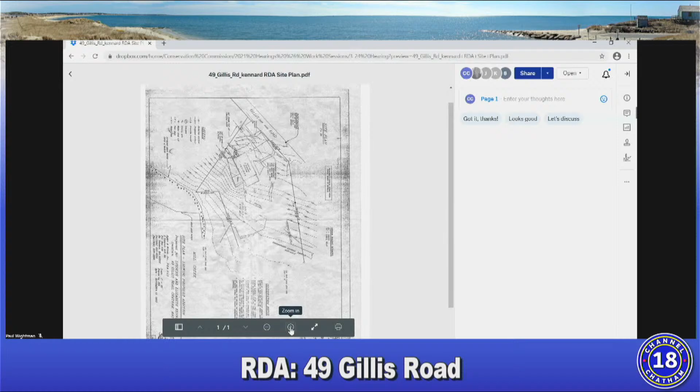And just the sonotubes would be installed, that would affect the coastal bank, nothing else? That's correct. And then you have a set of stairs coming around the other end, for the deck itself? There'll be stairs on the patio side that's already existing, and then there will also be stairs pretty much where there are on the front of the house on the porch. There are stairs coming in there, so we will be keeping those stairs. Okay, so the additional stairs would just be off the back towards the patio? Towards the patio, correct.

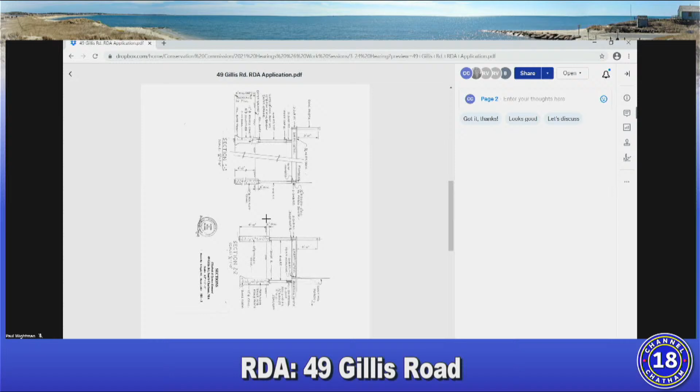As long as it's within that same footprint of the existing wall, inside of that wall, I would approve it. I do have some concern about the vegetable garden on the coastal bank itself, further down. But for this project alone, I would be okay with just those sonotubes. And that's all I have to say, Bob. Thank you. Okay.

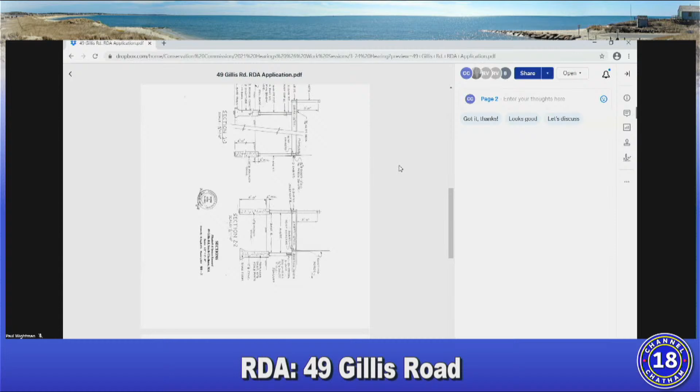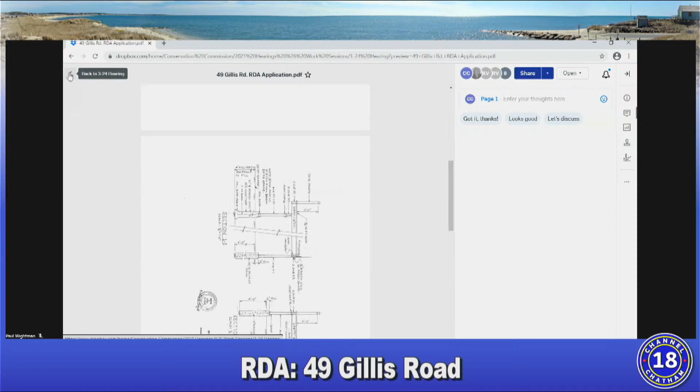Tom Clark, do you have any questions? Yeah, my question, unfortunately, is that the site plan, and now it sounds like it was an old one that was put up, given Bob's other comments, but the site plan that I was given had a big smear across the middle, which made it very difficult to evaluate the project. I'm glad that Bob mentioned the coastal bank, because that's almost completely missing from the plan I was given, and there wasn't one in the Dropbox.

So this is procedural. I had requested a replacement plan, but it never happened, so I assume, given all the goings on, that was overlooked. But my concern is the fact that we're building a deck on a coastal bank. That really troubles me in terms of stability and other factors that unfortunately I couldn't really evaluate because of the inadequacy of the materials provided, which I'm not saying are the fault of the applicant. That may have been something that happened in-house. I don't know. But that troubles me, having a deck on a coastal bank, and even with the sonotubes, which I recognize our informal regulations recognize as mitigation.

Mr. Chairman, can I just, it's Paul. The cost of doing a new plan would be really substantial for what is really an alteration for just a few sonotubes. That's the alteration, really.

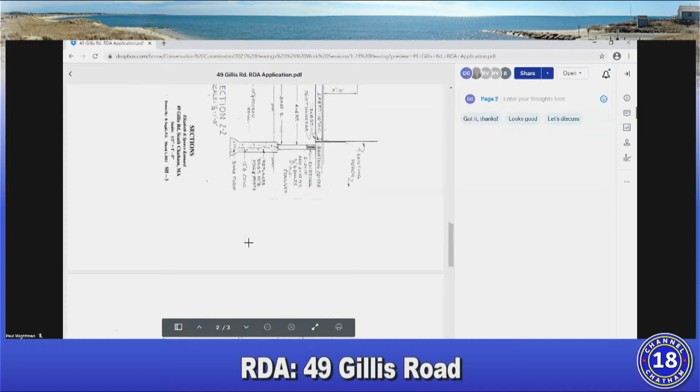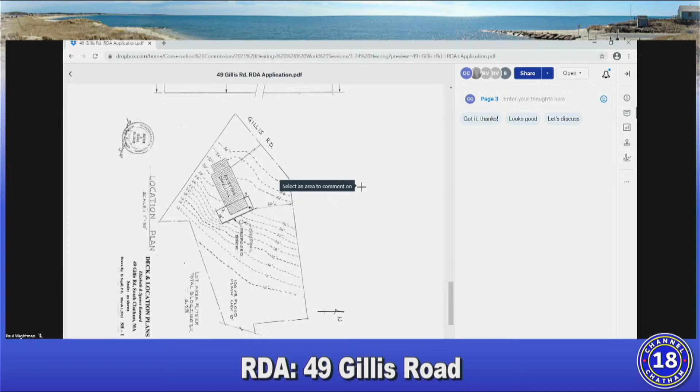And then there's another one that Mr. Kennard showed me when I was at the site, because of a couple of questions I asked. What he had is, correct me Mr. Kennard, an old site map from a previous edition, circa 2004 or something like that. Correct. Right. And that site map showed at the time what the resource boundaries are, whereas the current one, the new one, didn't show that, at least in the digital copy that I have.

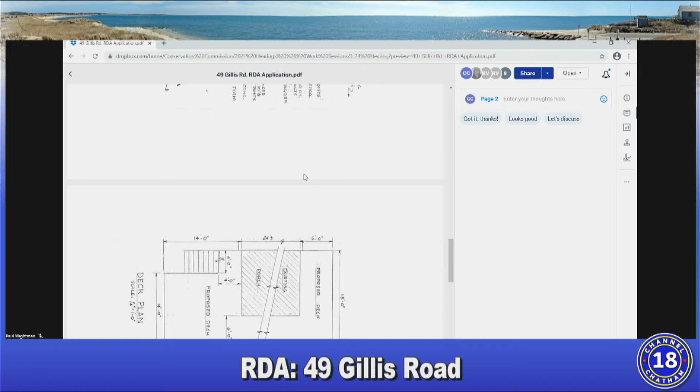So which one, Tom, are you saying is smeared? It's labeled site plan, and it looks like it's a copy of a blueprint, given its fuzzy nature.

And it's stamped March 9th, 2021. That is the current stamp. There's also a stamp from way back when that looks like, wow, I can't even tell what it looks like. 11/16/63 or 93, I can't really make that out because that's not very clear. It didn't reproduce well. The site plan is November 13, 2003. It was prepared by Ryder Wilcox.

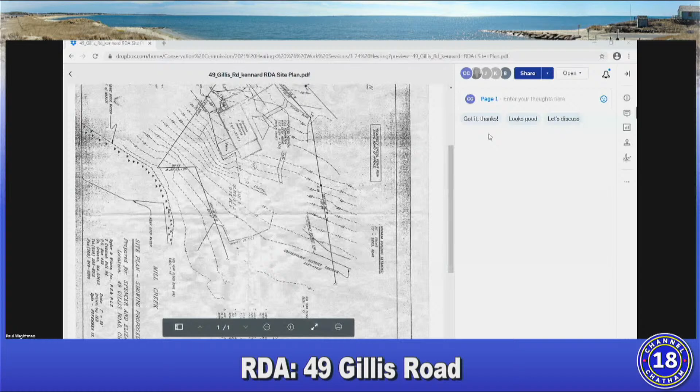Right, the one that you're looking at, the one that's on the screen right now, it's the site plan from 2003. Okay, all right. That's very helpful, thank you.

So, any more comments or questions, Tom? No, I'm just concerned about building a deck on the top of a coastal bank. Okay.

Commissioner Latin, do you have anything that you would like to hear? Well, the only thing that I would like to say is that I am concerned about the ground under where the deck will be and how that will be taken care of so that it doesn't erode, because it does go down the hill. I just want to make sure something's done to make sure that erosion does not happen.

All right, okay, anything else? Is that it? That's it. Okay, so I have a similar concern. I think when I was there, there was no plan to alter the ground beneath the deck, so it would basically be after the deck is in as it is now. So you can make the argument that if it's not eroding now, it wouldn't erode then. I don't know.

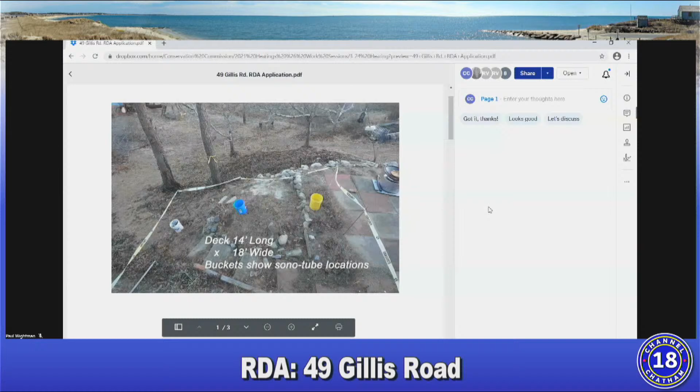So I think in general I would be willing to support it. I would be interested in having measures put in place to be sure that there is no erosion from the deck, no altered pattern of runoff from the deck after it's in, and so forth. I'd be interested in seeing something like that.

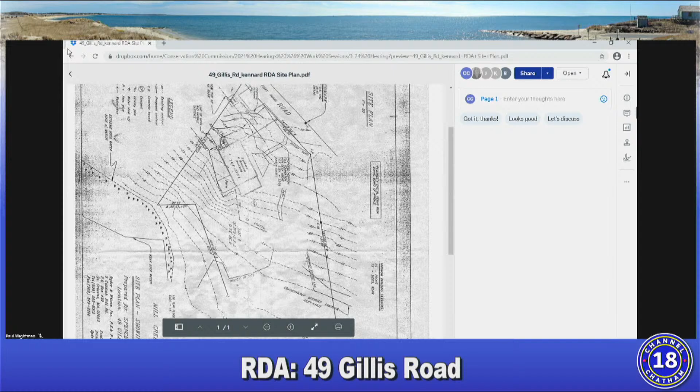Paul also mentioned, no, it was Bob who mentioned the vegetable garden. I saw it as well. Let me ask you a question, Mr. Kennard. The 2003 addition, did that have a mitigation area associated with it? It did not. It was on the left side of the house, out of the resource area. Correct, yeah, out of the resource area. Okay, just out of. Yeah, mitigation was not called for. No, it wasn't. Okay.

So the vegetable garden is on the coastal bank, and we actually have a lot of applications these days for vegetable gardens in resource areas, a number of which we have turned down. So what I would suggest, when we go to look at applications, we will sometimes notice other things, and that is what happened here. A number of us noticed the garden, and we can't just pretend like we didn't see it. So what I would suggest, and I talked with Paul a little bit about this, is for you to submit an administrative review for the garden so that we can get it recognized, get it on the books, and deal with it in an above-board way, if you would be amenable to that.

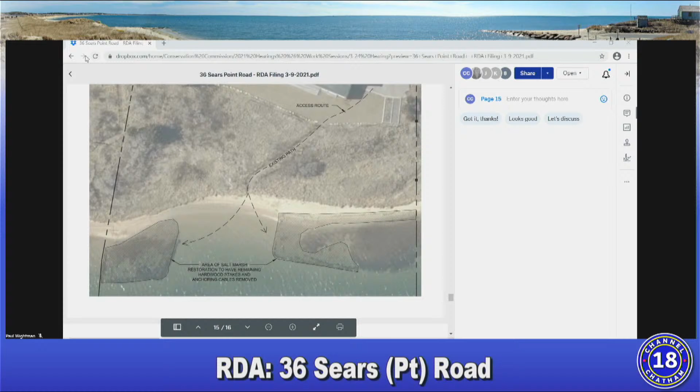So without any further questions, does anybody have a motion on this? I'd like to make a motion that we vote on this RDA. So the motion, I guess, would be a negative determination. Yes. All right, okay, Clark, second. All right, so Commissioner Clark, how do you vote?

Oh God, here we go again. If you're in favor of it, it would be a negative. If you're not in favor, it would be a positive. Negative, then. Okay, Commissioner Latin.

I have to remember we're standing on our heads with this one. Exactly, negative as well. Commissioner DeVecchio, negative. And negative for me as well. So that's a unanimous negative determination.

Just a point of order, Bob. Can I make an observation? Sure.

I've been on the commission for a little over a year, and it's only been very recently that we've started seeing a lot of RDAs. I think some people are getting happy feet about using RDAs as some kind of shortcut. And I think what we see with these two applications is that it's not a simple tool. Matter of fact, it can be very complicated and has its own shortcomings. So I don't know how we make it known, but the sudden obsession with using RDAs I think is poorly considered because of its shortcomings as a legal vehicle. So I just want to mention that so people know this is not a simple solution to a complex problem.

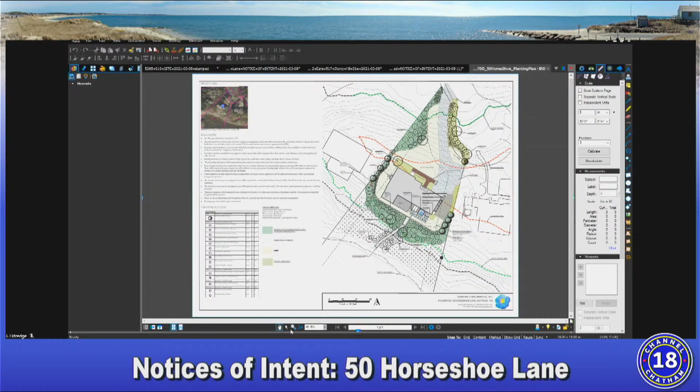On the south side of the house, the property owners, the Palmertons, are new property owners. They're proposing to install a hot tub, shift the existing rinse station to the east, and provide a bluestone stepping walkway to allow them to get from the outdoor shower to the spa and up onto the deck and then down into the bulkhead.

This area is currently almost entirely filled with gravel, so it's really just transferring and allowing for ease of access and circulation, and then removing the gravel and planting a fescue lawn in the areas that are currently gravel right around the south side of the house running from east to west.

There is an existing timber wall to the west of the staircase that is in poor condition. It's rotting and degraded, and we are proposing to repair and replace that timber wall, as well as extend it to the east to allow for easier access and circulation.

On the east side of the dwelling, we've got a gravel area and invasive English ivy at the top of the slopes, exactly in that area that Paul's pointing out. So we would be removing that English ivy, doing some minor regrading, and then extending that wall and planting that area with a fescue lawn.

On the area just to the east of the dwelling, there's an existing gravel parking area. We're proposing to remove that gravel and put in supported grass, a grass pave in that area - turf lawn on a plastic grid, that would be a fescue lawn. And that's just for occasional parking where the family will be storing a small boat in the off season.

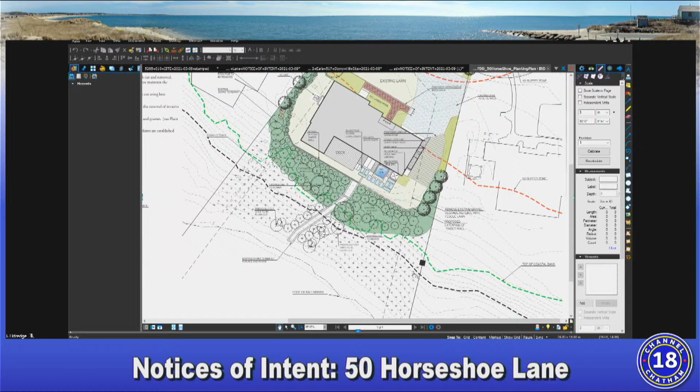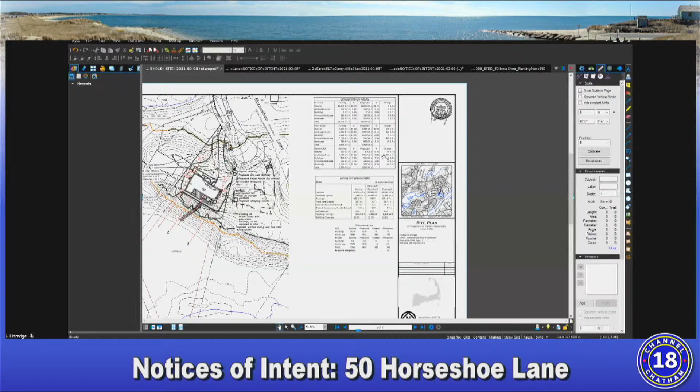I guess it's my turn to start. I had a little trouble following your coverage tables, but essentially it looks to me like you're increasing the amount of coverage by a small amount. You're taking out a lot of what I think is pervious hardscape and replacing it with more pervious hardscape. Is that a fair statement?

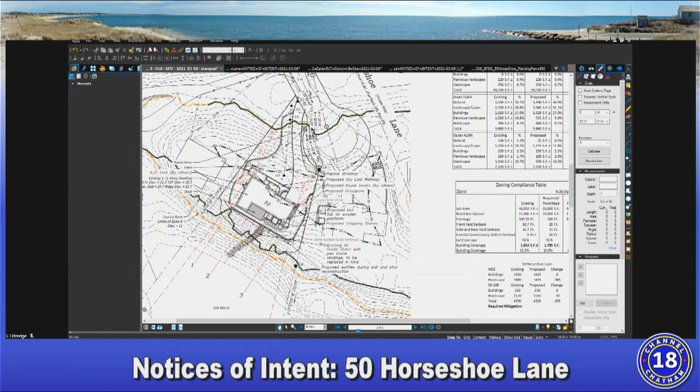Yes, so we currently have a stone driveway to the side that's being replaced with Grasspave, which decreases our pervious hardscape, even though it's still a used area. In the back, there's more lawn going in where there's currently pea stone, and it's hopefully an upgrade with everything.

So the net increase in impervious coverage is what, if any? 40 square feet of impervious. Okay, that is total within the 0 to 100. Correct. Within the inner area, it would be an increase of 80, and within the outer, it's a decrease of 40. And so we have as mitigation more than adequate amount for that increase in coverage.

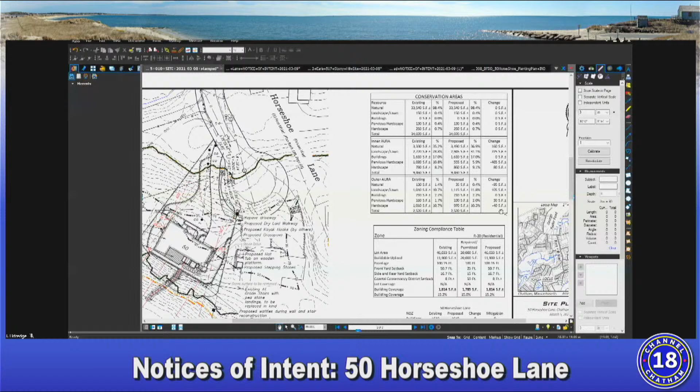Okay, fine, I just want to be sure I understood it. So I do have a question about the area on the driveway side of the house where in the landscape plan, Teresa, you have it color coded. You have two shades of green - the invasive species is a dark green, and on the other side of the driveway is a different shade of green.

Typical landscape, right, exactly. So what's existing there is a mix of non-invasive but exotic plants. This is right bordering the edge of the circle at the end of this road. The property owners would like to maintain more of a landscape here. So where all other restored areas are allowed to naturalize in perpetuity, this area would be proposed to be maintained because it's along the edge of the road.

Will need continued maintenance - there'll always be disturbance from plowing and other activities in the roadway. So they would just like to be able to maintain this regularly. We're calling it a typical landscaped area versus an area that's going to be restored and allowed to naturalize in perpetuity. Okay, so that's outside the scope of mitigation. Exactly, that's outside the scope of mitigation. We're not calling that mitigation. We're basically just looking at removing the invasive vegetation and restoring that to a landscaped, manageable area so the property owners between the driveway and the roadway can maintain that portion regularly, just to keep it invasive-free and clean.

Okay, and the other thing was the new lawn, the lawn itself in the 0 to 50. That's not going to be irrigated, is it? Only to get it established. So we're going to do the fescue lawn mix and it would be irrigated just to get it established, and then it will be on its own after that. Okay, and that's behind the house. It is, it's basically replacing pea stone. Yes. And is that the existing lawn in the 0 to 50, in the back of the house and the side of the house there, is that irrigated now, or is it not?

I am not sure, you mean on the street side of the house? No, I mean on the south side of the house and on the west side of the house. Don't believe there's any irrigation at all on the south side of the house, but I'm not sure on the north side if that lawn is irrigated. I will have to check with the property owners on that. Yeah, okay. So we wouldn't want any permanent irrigation on the south side anyway, or the west side. Thinking maybe if they want to continue it on the front of the house on the north side, that would be okay in my eye. Okay.

Other than that, there's some English ivy on the south side of the bank, the back of the house. So that's going to be all removed and replanted? Correct, where the new wall is going in. Yes, that's correct, all that English ivy will be removed. Okay, good, that's a good thing.

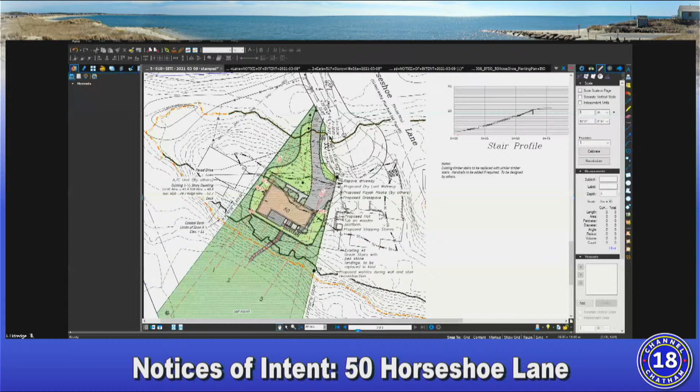All right, if I got everybody, I did have one follow-up question, more of a general request on landscaping plans. Very often, Teresa, not just yours but others as well, lawns are identified or labeled in a way where it's difficult to figure out whether there is non-native lawn or fescue/native lawn. Would it be possible, as a future request, to label native lawn versus non-native lawn more clearly? We have a call-out box, but maybe a different shade, texture, or hatch pattern.

Something would make it really clear, because very often I and others have questions about what is the nature of that lawn there. It would just make it easier for everybody.

Sure, absolutely. And quite honestly, I'm beginning to think that the term 'typical landscape' - we need to flip the paradigm on that. The typical landscape is code for non-native. It would be delightful if we could just start saying landscape, and anything that's not landscape is non-native. But anyway, that's just sort of an aside.

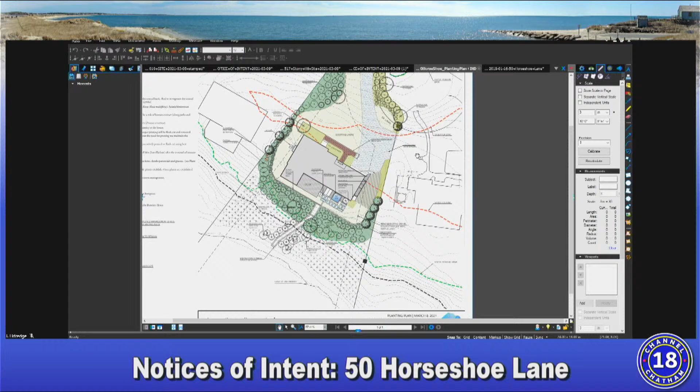Commissioner DeVecchio, aye. Commissioner Clark, aye. Commissioner Latin, aye. And I vote aye, so that's unanimous to continue to the April 7th work session. Thank you.

You're welcome. So moving on, Paul.

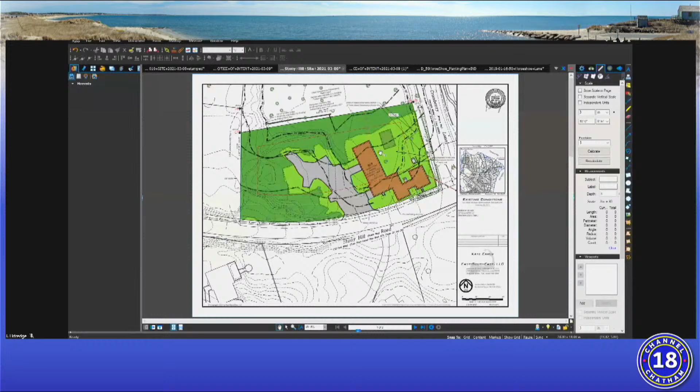Thank you, Mr. Chairman. Next on the agenda is notice of intent, 517 Stony Hill Road, Catherine Gledhill Earls and Michael Earls, no SE number yet. Proposed razing of an existing house, construction of a new dwelling, pool house, construction of a new septic system, implementation of a land management plan at the same address, assessors map 15-1, parcel 21.

Good morning, Mr. Chair. Bill Riley on behalf of Kate and Michael Earls. The team is Thad Eldridge, Jen Crawford, and Susan Sangiolo, our landscape architect.

It's pretty straightforward. If you've been to the property, the structure that's there hasn't been used in any significant way for many years, is deteriorating, and certainly is not appropriate for the neighborhood or usable by a family. So the Earls want to remove that building and construct a new home with a pool and a pool house.

What I'd like is to have Thad run through things, and then we have Jen Crawford for the land management plan, and Susan Sangiolo is available for questions on landscape architecture.

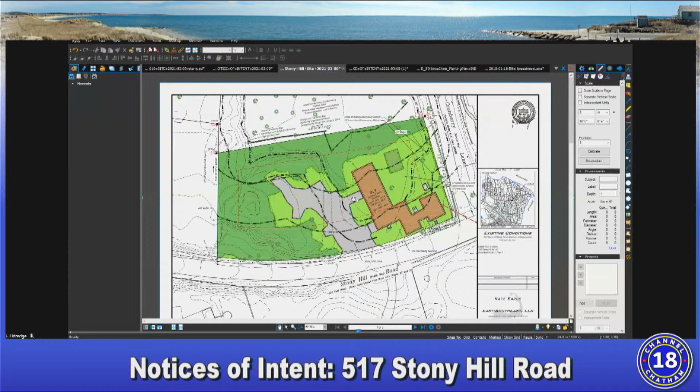The site itself is overwhelmed with Japanese knotweed and a few other invasives, but the knotweed is pretty substantial here. As Bill mentioned, we have an existing dwelling located less than 50 feet from the BVW. The proposal is to take down that dwelling and reconstruct the site, keeping as much out of the 50-foot buffer as possible. All the structures are being proposed outside of the 50-foot. There's a little bit of lawn that will remain within the 50.

And as Bill mentioned, we have a proposed driveway, house, and septic system located outside the 100-foot, leading over to a proposed pool with a pool house. And for mitigation, we have Jen Crawford.

Good morning, can everybody hear me okay? Excellent. So for the record, Jen Crawford representing the applicant. As Thad said, basically the portion of the property that is naturalized is inundated with various species of invasives, in nature, so to speak.

There are some native trees that are present - a couple of pitch pine, a couple of eastern red cedar, a few oak off to the east side. But the majority of the trees that you see on the property are actually off the property line. The land management plan that I submitted shows where those are and shows that they're just off property.

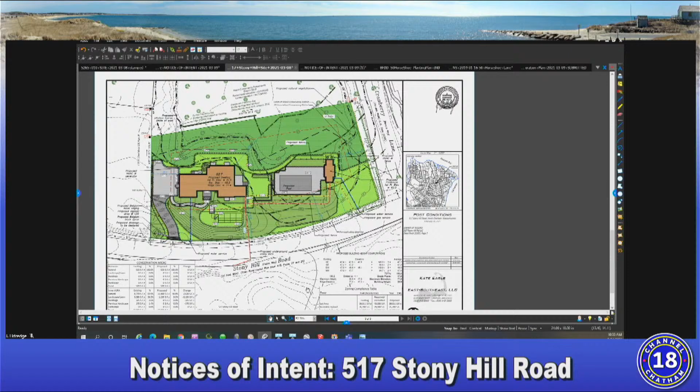Okay, Commissioner Clark. I didn't have any questions, but I did have one observation, and I've mentioned this several times to Tad, and I'm going to mention it one more time. I noticed on the table where you do your calculations of mitigation and so on, that you've gotten in the habit in the last couple of months of giving yourself double credit when you move out of the NDZ or out of the ORA. There's nothing in the regulations that permits you to do that.

I think as a policy matter, it's a good idea, although I'm not sure I would double it. But I think anytime you take improvements out of the NDZ, and even out of the outer ORA, that definitely is something that should be credited. But there's a doubling of credit when I don't think there's anything in the regs that supports it. It shouldn't be done. And now you can tell me why I'm wrong.

Well, I can say that it's not been a couple of months that I've been doing this. It's been for 16 years since the bylaw and the regulations were adopted, and that's carried on with the different mitigation guidelines that have been adopted by the commission. The last, I think, was revised in 2009, where we gained the 2-to-1 and 1-to-1. I've reviewed other filings and everybody does the same. And if you want to encourage people to get out, you should encourage it. Not giving credit where credit is due only encourages people to maintain within the no-disturb zone where they can.

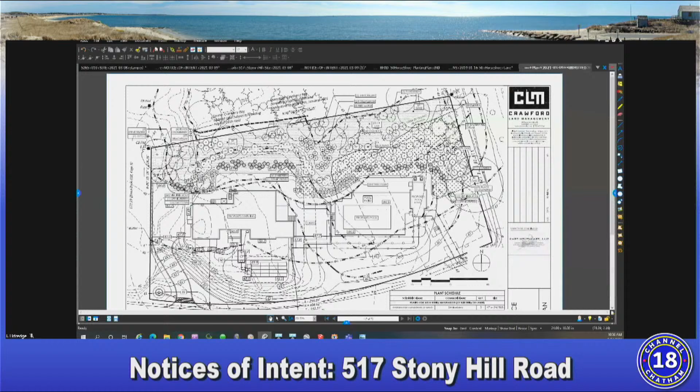First of all, I want to make sure that I understood the landscape plan showing that. Is my understanding correct on that? Bob, I think it's important that the homeowners are able to traverse all the way around the property, and that area is very narrow, only a few feet wide. But I think for maintenance purposes, it's important that they be able to access all those areas without having to go through naturalized areas. And on top of that, I think the ability of the project to provide basically an almost entirely vegetated no-disturb zone, as well as additional restoration for the invasives along the BVW, means no matter what, this project is a net benefit.

Bob, this is Bill Riley. I think on a practical level, homeowners are going to walk around the house, so it's better to keep them in a narrow path and let them wander, rather than trample down naturalized areas. That'd be my thought. Oh, I agree with you.

I guess the point of my question is I agree that applicants must be able to walk around their property, the circumference of the property, no question. What I'm getting at is if the scale of the pool, patio, and pool house were reduced, or if there was some retreat from the NDZ, you could still have that walking path, and it would not be in the NDZ. My question is whether that is feasible in your view.

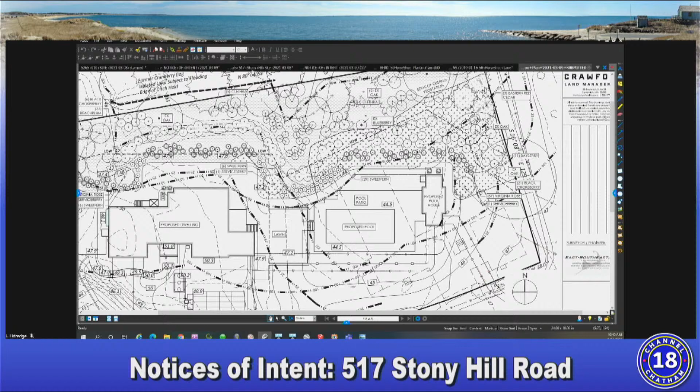So anyway, I want to say something about that. Yes, walking paths are permitted in the NDZ, but typically we have that when the applicant wants to walk down to the water, adjacent to the property. So walking paths through the NDZ in this particular case is, I think, a different matter to some degree.

Bob, this is Bill Riley. So looking at the plan currently up there, the walking path you're principally concerned with is the one between the house and the pool and patio. I'm concerned with any lawn in the NDZ, is what I'm concerned with.

Well, alright, so with regard to the path between the house and the pool and patio, I'll be happy to speak with the property owners and see how they feel about shifting it so it would move outside the 50. I think the lawn on the north side of the house is sort of the minimal amount. We want to protect 0 to 50, but we have to give people a little bit of space outside as well. And I think it's also worth noting that the areas on the north side of the house, the walking path around and directly behind the house, most of that is already either lawn or developed area or driveway. No native vegetation is being impacted by transitioning those areas to an area that's in use. So there's not really a change in use at all.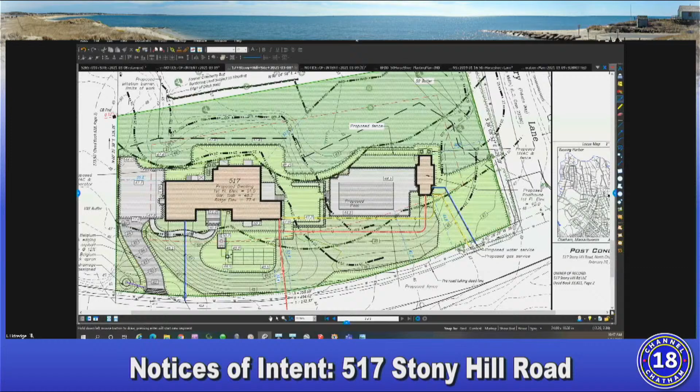Okay, thank you, Mr. Chairman. Next on the agenda is another notice of intent, 73 Kent Road, Philip Chu and Jessica Guo, SE 103480, proposed demolition of an existing dwelling, swimming pool, construction of a new dwelling and swimming pool, same address, assessors map 12J, parcel G4. Revised plans have been received.

Good morning, Mr. Chair. Bill Riley on behalf of Philip Chu and Jessica Guo. The team for this is Dave Clark and Teresa Sprague. David has done some modifications to the plan, so I'll ask Dave to take over now.

Yes, good morning, David Clark, Clark Engineering. Trying to see where I can put the plan up on the screen, but I don't see any link to do that. But anyways, do you want to display the site plan? There it is. Oh, wait. Drop down one more. Oh, there you go.

Good, yeah, the only modifications to the site plan were at the request of the commission: to label the patio as dry laid, and although it's barely visible, that note was added. And regarding the disposition of the retaining walls down the slope, we added a note that they will be removed. So those are the only changes to the site plan.

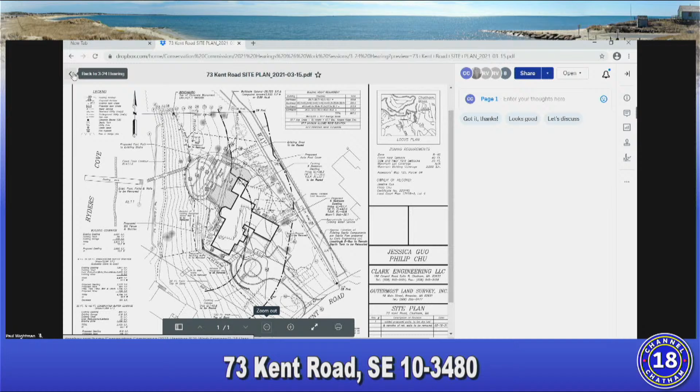I think after Teresa's presentation, if you want to put Teresa's plan up, my memory is that the commission felt that was adequate mitigation and restoration. If there are no further questions, we can continue to the work session. It might be helpful to put it up. If you have any questions for Teresa, she's available too.

Good morning again, Teresa Sprague, Blue Flax Design. Our revisions were simply that there were some discrepancies between our plan notes and the count in the planting schedule, so we've gone through and made sure all of those numbers match. In addition, we put a note on our plan regarding the fact that any lawn would be a native fescue lawn within jurisdictional areas.

My notes also show that Dave was going to add the retaining walls to the site plan, which I think he did, the retaining walls to be removed. And I saw, Teresa, that you normalized the count of shrubs, trees, and plants. Correct. I also want to make the commission aware that we added the additional tree that was removed under the RDA for the septic system. There's a note for that on the planting plan. I think those are all the things we asked for, so I'll throw it open to commissioners if they have anything else they recall we asked for, or any further questions.

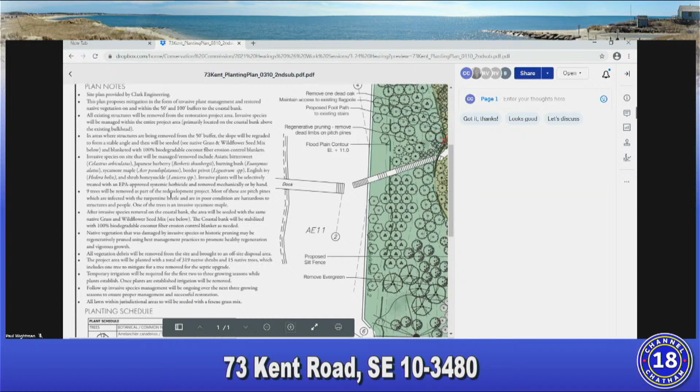I have a question. The lawn areas within the 0 to 50 buffer, will those be irrigated or not? None of the fescue lawn will be irrigated within the 0 to 50-foot buffer. There will be temporary irrigation only to get everything established for the first couple of growing seasons. Is that specified in the management plan or the plan notes? We specify it in the plan notes always, this is a note that's on all of our plans, that temporary irrigation will be provided for the first 2 to 3 growing seasons while plants establish. Once plants are established, irrigation will be removed.

All right, other than that I don't have any other questions. Thank you. Anyone else? I'm good. All right, so hearing nothing, do I have a motion to move this to the April 7th work session?

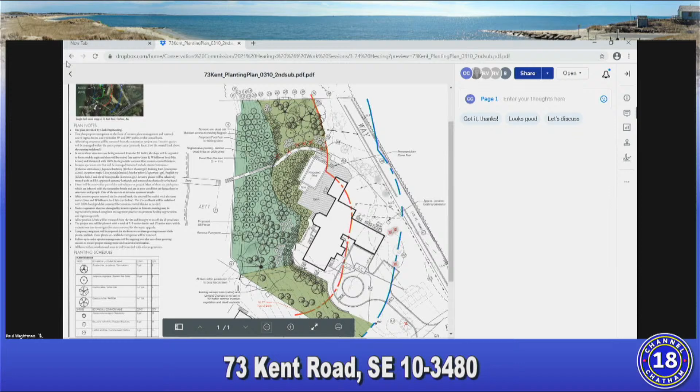I make a motion that we move this to the April 7th work session for an order of conditions. Second. All right, we'll take a vote. Bob? Aye. Tom? Aye. Karen? Aye. And I vote aye as well. So that is scheduled for the April 7th work session.

Thank you very much. Excuse me, Mr. Chairman, this is Mary. I just wanted to call attention to the possibility that Mr. Riley is going to continue the previous hearing till April 7th. The April 7th meeting is very long, and to continue a hearing to that date may make that agenda too full. I see what you mean, Mary, that is a good point.

No, we wouldn't continue the hearing. If it goes to the work session, it would be for the order of conditions, not the hearing itself. If we continue the hearing, it'll go to the 14th. Okay, well we'll find out when you come back today whether what you're proposing would allow us to go to the work session, right? Right. But I appreciate your concern, Mary.

Thanks, Bill. Don't say it if you don't mean it. Hey Mary, what is your last day? April 1st. We love you, Mary. I didn't plan on announcing it, Bill, on TV. Well, but everybody gets to send you flowers and thank you notes and show appreciation for all your years of faithful work. Thanks, Bill.

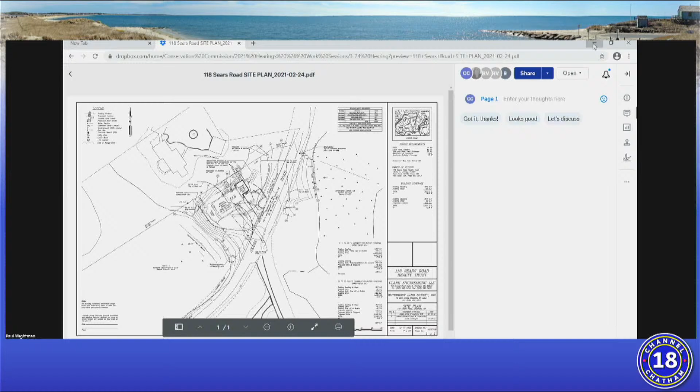Thank you, Mr. Chairman. Next on the agenda is a notice of intent for 118 Sears Road, 118 Sears Road Realty Trust, Cecilia Clancy is the trustee. SE 103475. Proposed construction of a garage addition, relocation of a driveway, and mitigation plantings within a coastal bank at the same address, Assessor's Map 11A, Parcel B. Revised plans have been received. I'll put those up.

Good morning again, David Clark, Clark Engineering. This was continued because we were proposing an alternate driveway. I believe the first time around the commission didn't really have too many issues with the project. So the revised plan shows the turning area from the driveway flipped from the south/southwest side of the driveway to the northeast side. So the new driveway is completely out of the no-disturb zone, and Phil Cheney revised his restoration plan to include more native plantings in the area of the existing driveway that's going to be removed. So that's basically it.

And that is what my notes show is we were waiting on. And also we were waiting on ZBA. Has that now been concluded? ZBA has approved it. They've approved it. Okay.

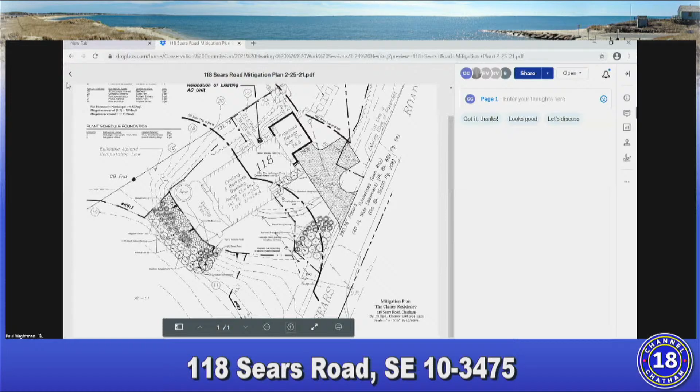Any other questions or comments from anyone? Hearing none, I think this is another one where we can have a motion to continue to the April 7th work session for this project. I make a motion to continue this to the April 7th work session for an order of conditions.

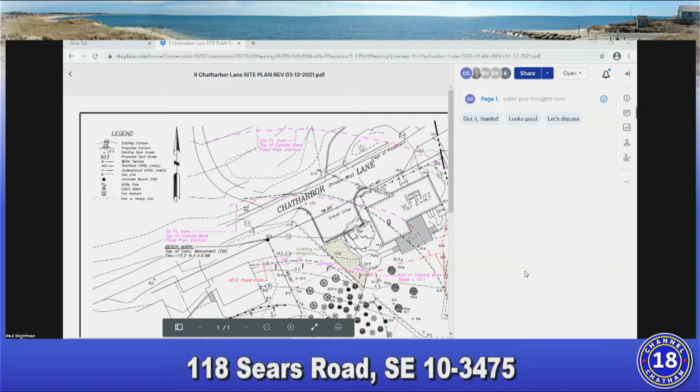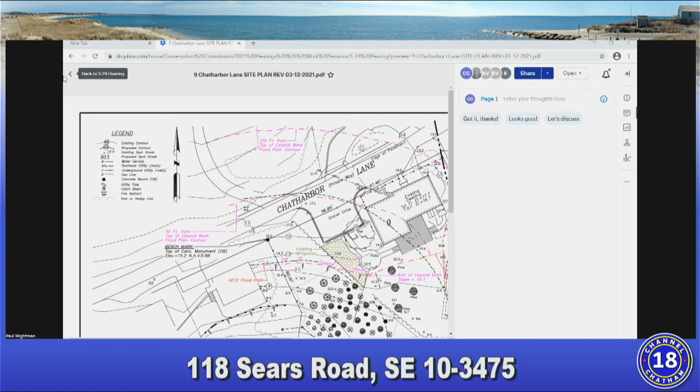You have a second. Clark, second. Let's have a roll call vote. Commissioner DeVecchio, aye. Clark, aye. Latin, aye. I voted aye. So we will take this matter up for order of conditions on April 7th. Thank you.

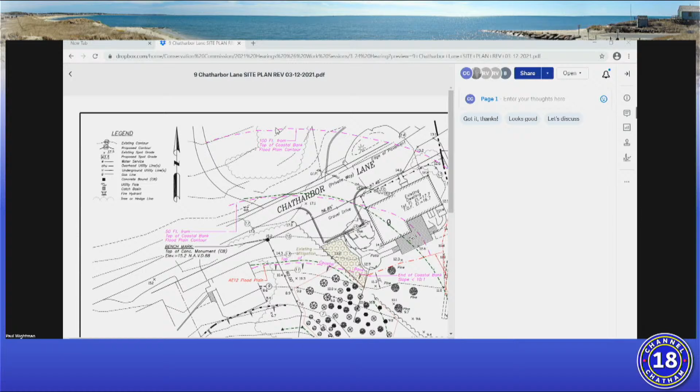Next on the agenda, Mr. Chairman, is 9 Chatharbor Lane, notice of intent, applicant Deborah B. Charlebois, Revocable Trust, 2012, owner Timothy and Deborah Charlebois, trustee applicants, SE 103470. Proposed removal of invasive plant species at same address, assessors map 5B.

Revised plans have been received, and I will put those up. David Clark again on behalf of the Charlebois. We continued this for a planting plan. We received a planting list from Tim Kent, the landscape contractor, and we've added those plantings to our site plan. Basically, it's a mix of shrubs. Although no trees are coming out, we are proposing some cedars over to the north end of the restoration area, more as a screen to the neighbor.

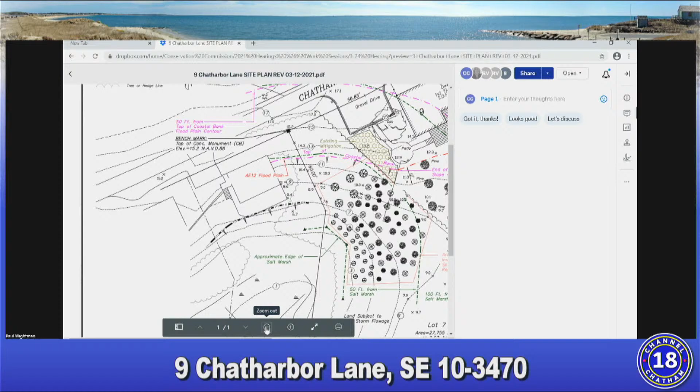I think that's what the commissioner was looking for, and be happy to answer any questions. Do we have, are you by yourself, David? I believe the Charlebois are online. Oh, okay. But I was just wondering about Timothy if he's here. I don't see him popping up, but okay. I did provide a revised narrative from Tim. Okay. Yeah, we have it.

So I think that is what we were waiting for on this one. There was also questions I recall on how the material that's taken out is going to be taken to, according to the narrative, to the stump dump, and I assume that means T.W. Nickerson landscaping site. Yes. Yeah. Okay. Because we're not dealing with Japanese knotweed or material that really propagates from rhizomes. We can all be taken to the stump dump and ground and composted.

Okay. Yeah, that was really what I was going to ask, is whether there will be any knotweed or. I didn't see any Japanese knotweed on the property. Or anything that would wind up in the mulch that then gets sold. In other words, the procedures for making sure that what gets taken out of there doesn't show up in other people's yards when they take the mulch. I mean, that's where it all goes, pretty much.

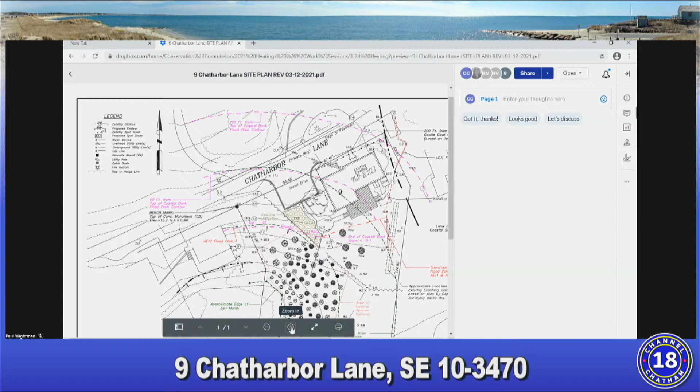This started off as a view management project, and because there were so many invasives, we understood that the commission wouldn't prefer us to just annually continually top the invasives, which obviously invigorates them. So that's why it evolved into a restoration project. But it's pretty much the corridor you see. We'd like to manage the entire area. It's really the only view this property has out to the southwest over the Salt Marsh into Nantucket Sound.

So you're asking for an ongoing condition that the view be maintained by the owner? Yeah. In the past, the typical condition would be that photographs would be taken prior to the work being done, and notice be sent to the agent, then either the agent goes out to the site with the property owner to review what's going to be done, and then take pictures afterwards.

Paul, do you have any comments on that request? Actually, David's correct. I think the way it should be done is that the commission still maintains control over what is proposed. He proposes something to the agent, who then transmits that to the commission, either at a work session or whatever, so that you have an ongoing condition whenever this is done on an annual basis, but the conditions are such that there's the ability for the conservation commissioners to have input over what is happening, not just let the agent decide.

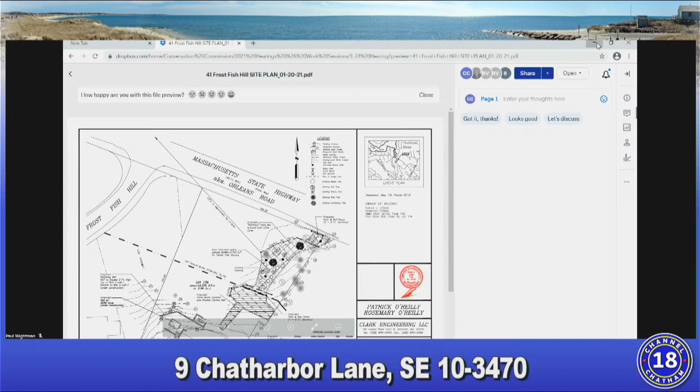I make a motion that we bring this to the April 7th work session for an order of conditions, contingent on receiving an updated plan with language describing a view corridor where the planting takes place. Clark, second. All right, roll call vote: Commissioner Delvecchio, aye. Clark, aye. Latin, aye. And I vote aye. So we will bring this up at the April 7th work session. Thank you.

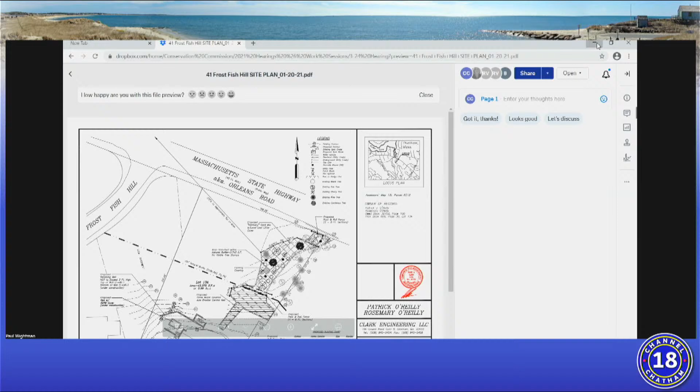All right, Paul, thank you Mr. Chairman. Next on the agenda is another notice of intent, 41 Locust Lane, Jonathan O. and Alyssa W. Downs, SE 103478. The hearing is open for proposed construction of a catwalk and dug-in steps to access Black Pond at the same address, assessor's map 15F, parcel 53. Revised plans received—I'll see if I can put those up. All right, and do we have anyone here for this project?

Good afternoon, this is Teresa Sprague with Blue Flax Design. Stephanie Sequin with Ryder and Wilcox was presenting this project initially. Blue Flax Design is working on the restoration plan for the project right now and actually implementing that plan, but I don't know if Stephanie is here. All right, hi, good morning. Oh, there's Stephanie—she is. Sequin. Hi, sorry about that.

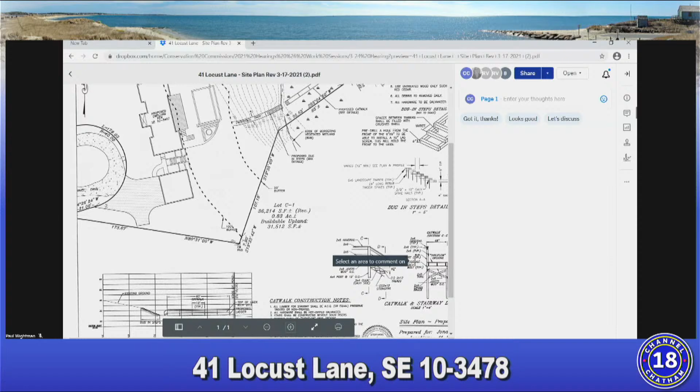I did a comparison as mitigation for the proposed catwalk going over the vegetation. It is elevated an average of 2 to 2.5 feet above the ground surface, and the through-flow decking being proposed has 43% of its surface open.

So even just laying flat on the ground, 43% of the catwalk allows sunlight through. You raise that off the ground and even more sunlight can get through to the ground below.

By comparison, a typical timber decking structure, if you used 1x4 decking spaced 1/2 inch to 3/4 inch, even using the 3/4 inch gap would only give you 19% sunlight passing through. So I think this through-flow decking provides a significant increase in the amount of sunlight allowed to penetrate through to the vegetation below.

So hopefully that answers all the questions you had from last week, and I'd be happy to discuss anything else you have in mind. Thank you, Stephanie.

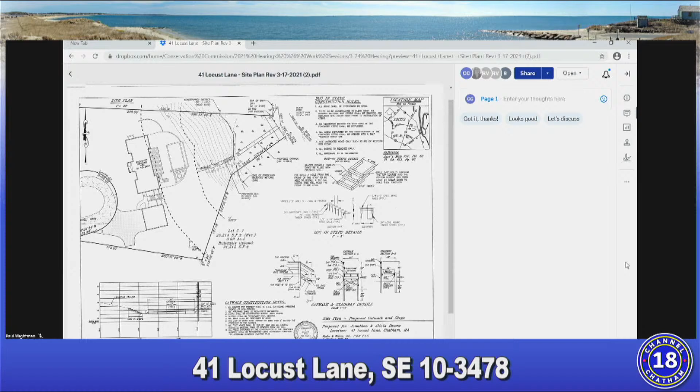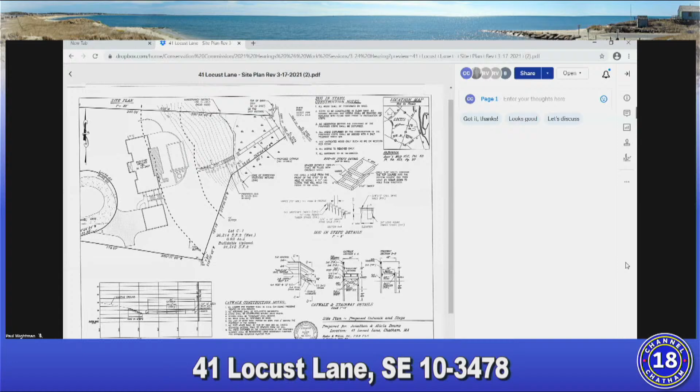So it looks like we are in position to entertain a motion to continue this to the April 7th work session as well. I'd like to make a motion that we continue this to the April 7th work session for an order of conditions, with an updated plan showing the rack on the proposed structure.

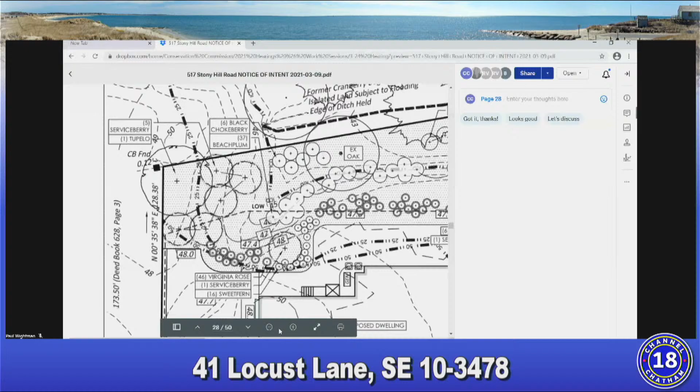So we will continue this to the April 7th work session with the amendment, or with the updated plan that we talked about, pending. Very good. Thank you very much.

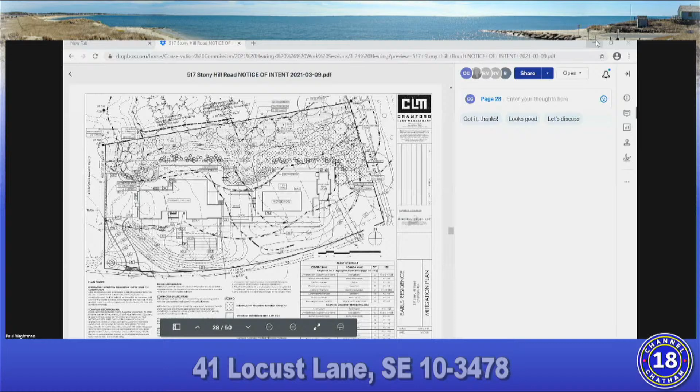Mr. Chairman, Mr. Riley has informed me that he's ready to continue the 517 Stony Hill Road application, if you would like to do that. Yeah, let's go ahead and do that.

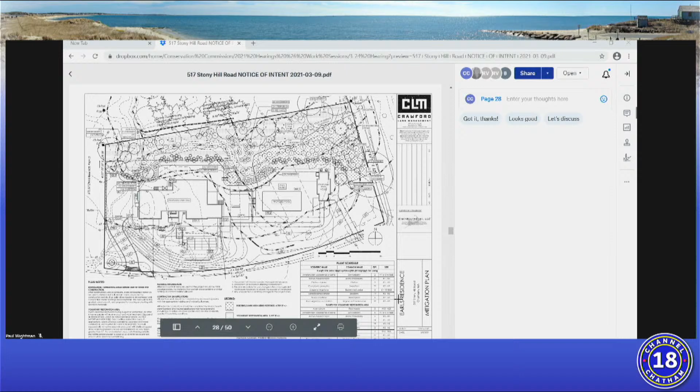All right, thank you. Can you hear me? Yep, okay good. So Thad has a revised plan, very simple revision, simply eliminating the path that follows the curved line from the house to the pool area. Thad, can you put that up? I am working on it at the moment. There you go. Oh, see, so the dark green...

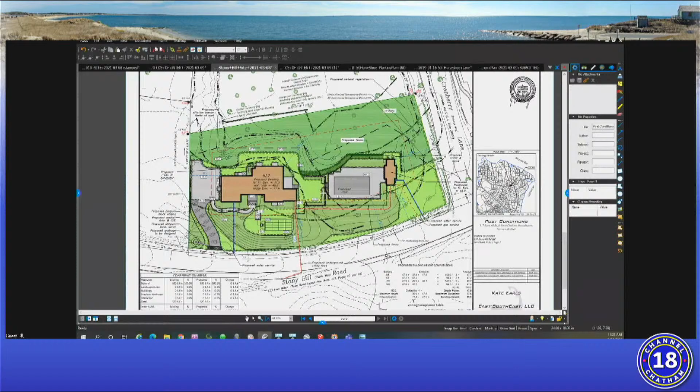Would be the elimination of the lawn path. I don't know if it's going to be just a fescue lawn or if it's going to be mixed in with the mitigation and restoration planting. Jen, are you on? Yep, I am. And Bill, we would propose that as part of the naturalized restored area.

Okay, so we would like to keep the lawn area on the north side of the dwelling, just to have a little room around the dwelling. I would point out, and I'll ask either Jen or Thad to give us the numbers, but we're way over in a sense in terms of mitigation and restoration. And so I know that it's not a favorite of yours, Mr. Chair, but I believe that allowing this tiny little area of lawn on the north side of the house is appropriate given the massive mitigation restoration we're doing. I'm pretty sure either Thad or Jen can give you the numbers in terms of how many square feet.

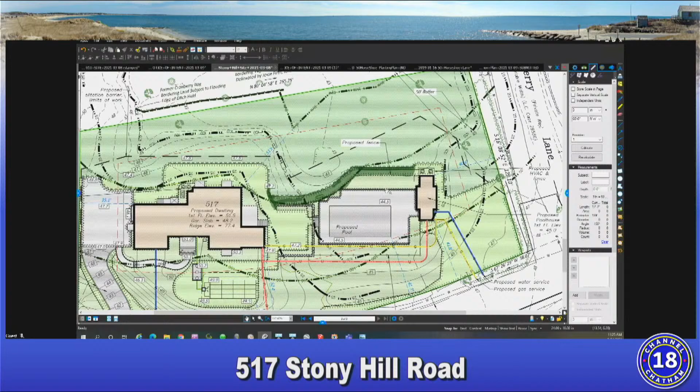Yeah, I would make a recommendation that we not allow permanent irrigation in that space, and just allow it on the front, and the other lawn areas would be fine. Also, the parking area, that's not labeled as being pervious. Is that a pervious area to the west of the building? Oh, very good, it is proposed to be a stone or shell parking area. Could that be labeled as such? Yep.

And also around the pool, the patio, is that going to be pervious or impervious? That would be a dry laid patio. So pervious, okay, could that be labeled as well? Okay. So other than that, if we can make those changes, I'd be in favor of the plan.

Thank you. Yeah, I echo your interest, Bob, in not having any irrigation. We have never allowed in-ground irrigation in the no disturb zone, so we wouldn't be able to make an exception here as well. Any other comments or questions from anybody else?

Okay, so it looks like we are ready for a motion to continue this to the April 7th work session as well. I'd like to make a motion that we continue this to the April 7th work session for an order of conditions. Second.

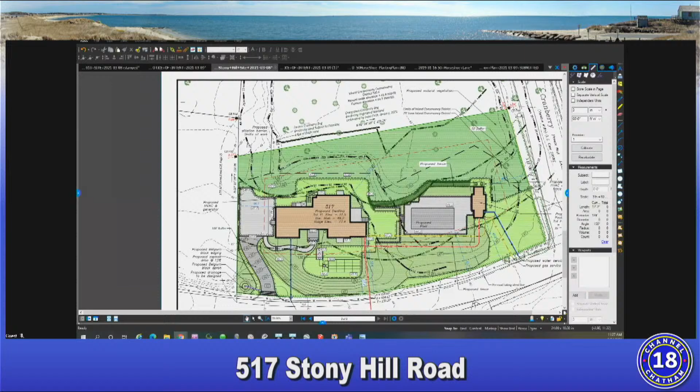Commissioner Latin. Aye. Commissioner DeVecchio. Aye. Commissioner Clark. Aye. And I vote aye. So we'll pick this up on April 7th.

And thank you all for working with us on this. Oh, well, thanks for the courtesy of allowing us to make the revision during the meeting. Thank you very much. Thank you very much. All right.

Mr. Chairman, thank you. Next on the agenda, a notice of intent, 227 Vineyard Avenue, James Azenero Jr. and Azenero, SE 10-3471, proposed construction of a garage addition, invasive species control at the same address.

Assessors map 11C, parcel D131. I just have to add one note for 517 Stony Hill.

It was continued to the April 7th work session. We still have no SE number, so Mr. Riley might want to give DEP a call to get that going. He wants his order by then. That's about it.

Bill, are you still on the line, or did you hear that? I'll reach out to him. Okay, all right.

Do we have anyone here? Oh, sorry, David Clark here for Azenaros. The commission asked us to take a look at trying to get the garage as far out of the no-disturb zone as possible. So there was some room to move it closer to the street, and that reduces the amount of the garage within the NDZ to the salt marsh by 86 square feet.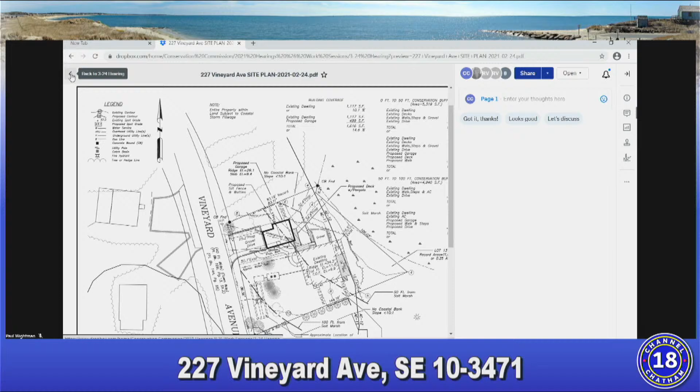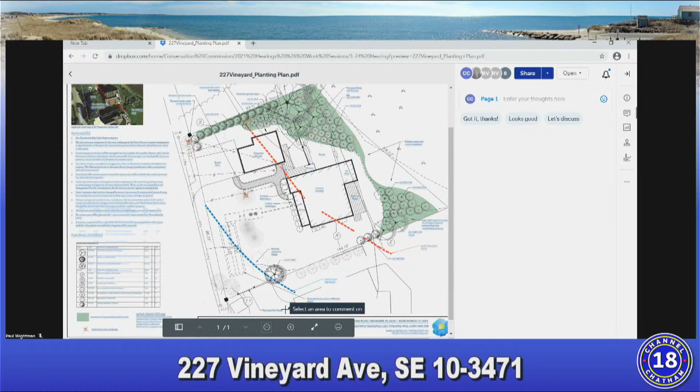Chairman Rawls, this is Teresa Sprague with Blue Flax Design. I can update you on what was requested from our office. Our office updated our site plan to revise it so that with the new garage location, we added an American holly to our plant schedule, and we removed the privet hedge from the plan. So those are the updates that I believe were requested at the last hearing of this project.

Yeah, I think that's what I have. When you say remove the privet hedge from the plan, did we remove it entirely? Entirely, even along the entire area where it originally was. Okay, good. Exactly. Yes, all right.

Very good. That is what I recall we asked for, and I appreciate it. Do we have any comments or questions from anyone on the changes? Hearing none,

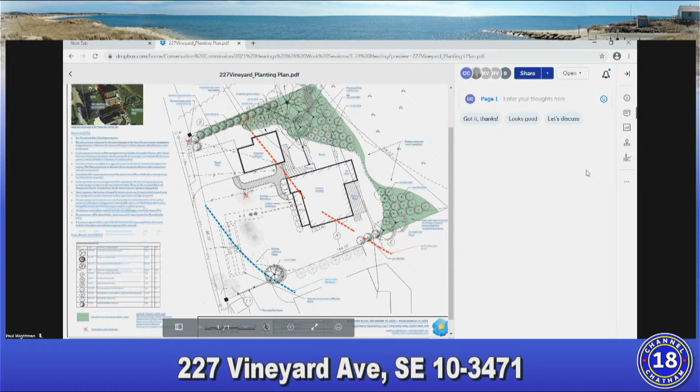do we have a motion to continue 227 Vineyard to the April 7th work session? I make a motion that we continue 227 Vineyard Ave through the work session on April 7th for an order of conditions.

Clark, second. Commissioner Latin, how do you vote? Aye. Commissioner Clark, Aye. Commissioner DeVecchio, Aye. And I vote aye as well. So we will take this up on April 7th, along with quite a few others.

Thank you. You realize we're going to lose a weekend because of this. All right, so.

Is anybody here for 305 Main? Yes, David Clark here. I guess nobody received the email requesting a continuance. We're still working with Historic Commission on this one. It's been a year, I think, or getting close to a year. I think we're on the home stretch for the Historic Commission, but we still have to go to Zoning Board of Appeals too. So I'd like to continue it to April 28th, if that's available.

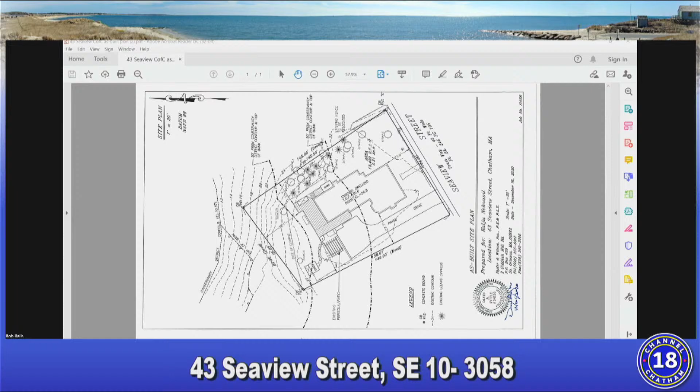Okay, no questions myself. Anybody else? And hearing none, do we have a motion to approve the certificate of compliance? Make a motion that we approve the certificate of compliance for 43 Seaview Street. Commissioner Clark, Latin, second. Commissioner Latin, aye. Commissioner Clark, aye. Commissioner Delvecchio, aye. And I vote aye. So that COC is approved.

And Mr. Chairman, if you could help me with the next one too. Sure, yeah, I don't know, I just somehow my share screen thing just went down. The next COC request is 597 Orleans Road and 0 Wells Hollow Road, William P. Howe III, and Christine A. Hardy, Heather H. Caney, SE 10 3174.

This was a project for land management, and a partial certificate was issued for completion of the work at 0 Wells Hollow Road and recorded by Wilkinson. This is a fairly complex one. Hold on a second. There were three phases for this project. I'm sorry, that's not correct. This was a project basically to, hold on.

Yeah, I'm having trouble too also, Paul. Yeah, just a, I don't know, second, hold on one second. Here we go. Is that, are you seeing it, or am I? Yeah, I am seeing it.

Okay, great. So the project activities were native restoration planting in early 2018. Monitoring reports were submitted in accordance with the order. The commission was informed, and those reports were reviewed. Another site visit was conducted on October 28, 2019, and basically Wilkinson's requesting a certificate of compliance for the restoration and management work that was done, with ongoing condition number 1 and number 2. The first one is to allow the ongoing maintenance of invasive species to remove them. The second ongoing condition would be an annual mow in late winter or early spring.